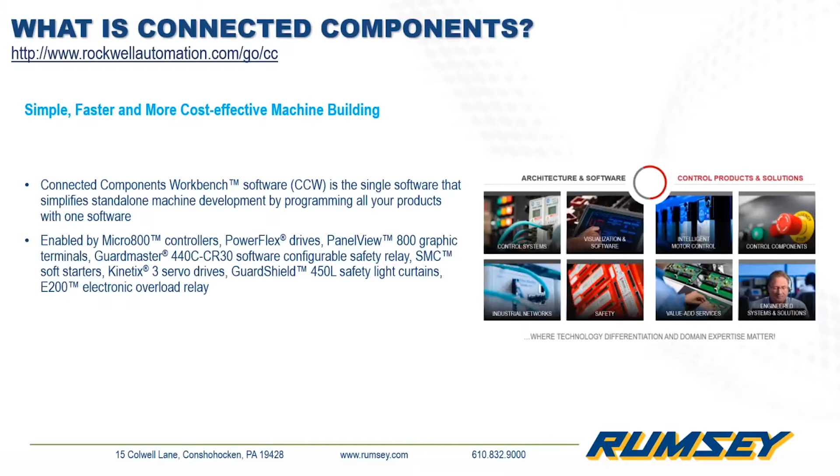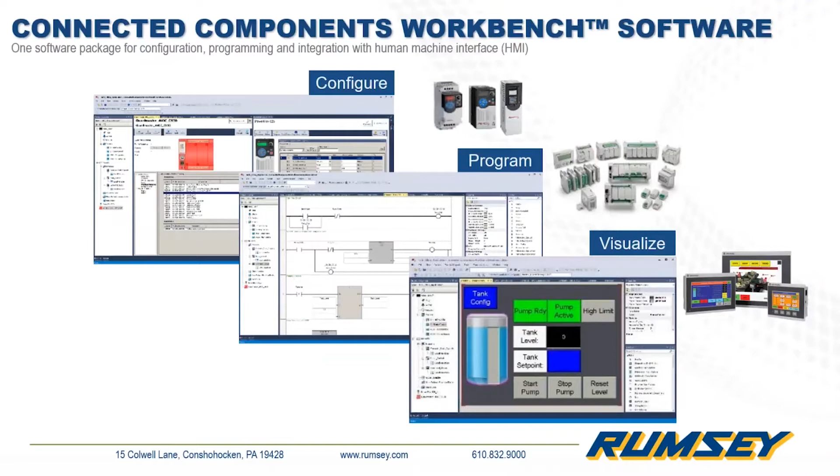So Connected Components Workbench software is a single software that supports configuration of devices such as the PowerFlex drives, and programming. So we have a program editor in here for the Micro800 and even DeviceLogix, which we're going to get into later today, and a visualization editor, which allows us to develop screens for the PanelViews.

So moving on to using Connected Components Workbench software with PowerFlex drives. There are multiple options for programming and interfacing with PowerFlex drives. I think most are familiar with the traditional way of programming a drive via the keypad or the drive HIM. So basically, you'd be standing in front of the drive, viewing and editing a single parameter at a time.

Connected Components Workbench software helps us to basically get the drives up and running using an intuitive interface and configuration wizards. So we can configure, program, monitor, and control from our computer. We have access to application and trending wizards. You can save or back up configuration files to your computer. And it's designed to be used for standalone machines.

Lastly, Studio 5000 can be used for programming drives as well, drives that are integrated and being used along with a Logix 5000 controller. And this gives us additional features, which would be Premier integration using add-on profiles to configure the drive, and also automatic device configuration.

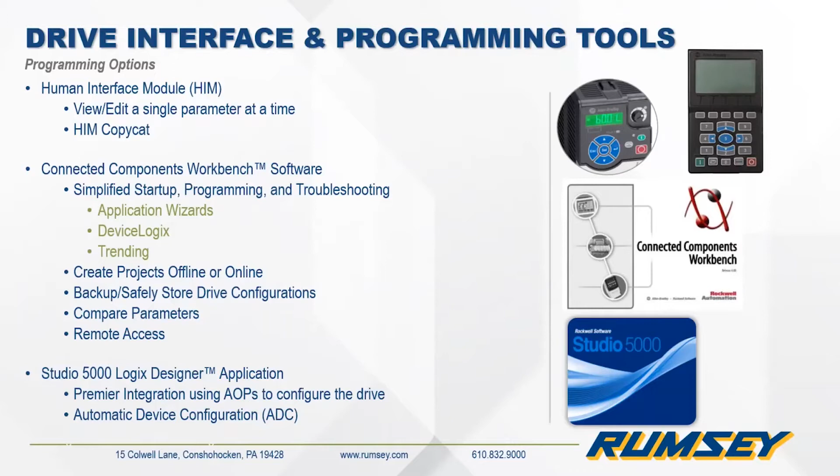So if someone is familiar with using Studio, for instance, and they needed to do an application with a standalone drive, it might not be with the Logix controller, they should be comfortable configuring a drive in there. And the same goes if you were already programming or configuring drives in CCW and needed to do something in Studio, you'd look and have familiarity there.

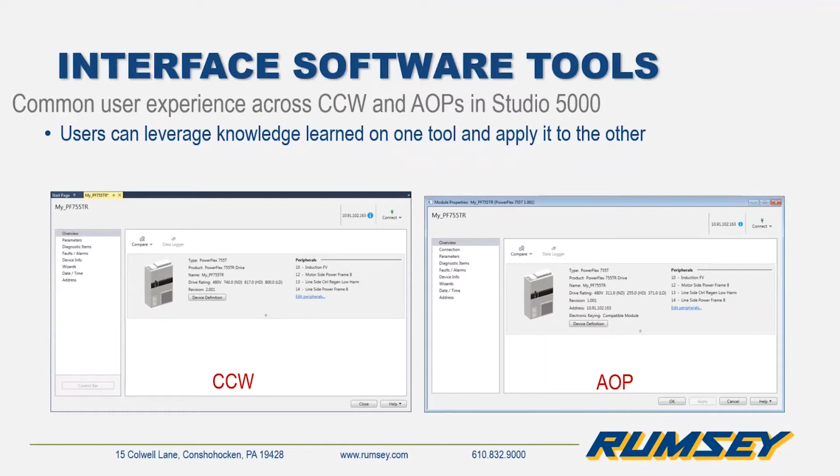So Connected Components Workbench software supports configuration for all current active PowerFlex drives, including the new PowerFlex 755T and medium voltage drives. So in the next few slides, we're going to cover some of the features and navigation of the software.

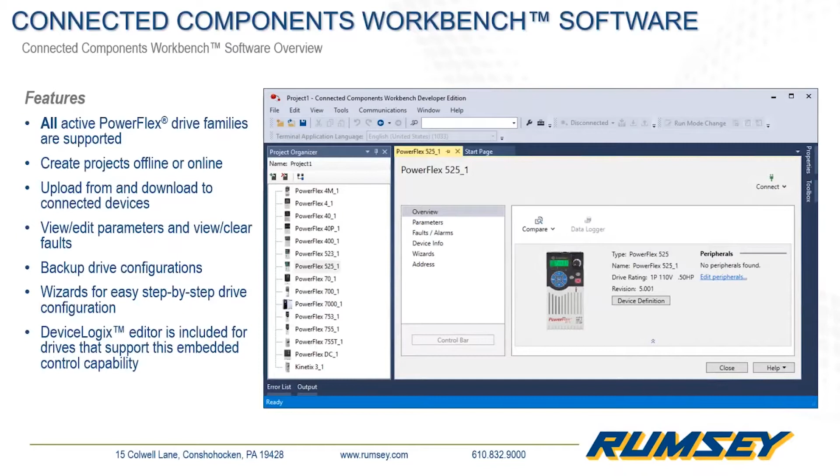So the start page is your launching point for starting a new project, opening existing projects from file, and also browsing or looking for available devices that we can connect with and go online. When we first open up the software, you're going to see basically a start page. On the right-hand side, there is a device toolbox.

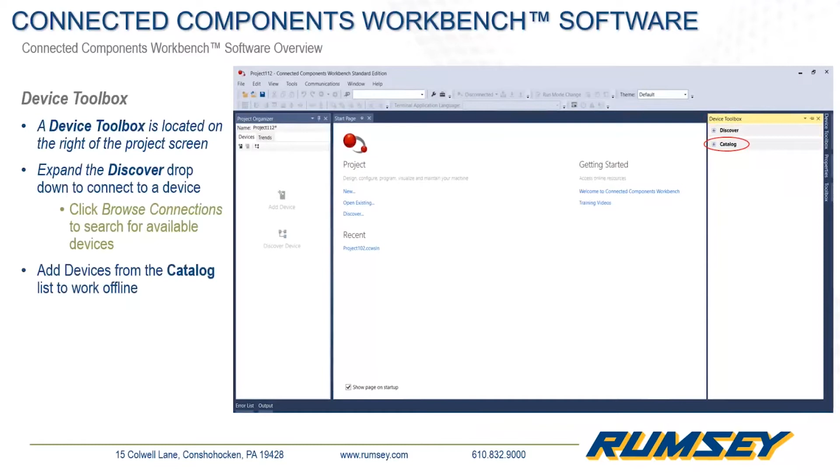There we can actually look for or discover devices that are available to connect by expanding the Discover drop down and look for connection browser or look for available devices that way. And also below that, there is a catalog, which if we expand gives us a list of available devices that we can bring into our project to work offline. If we select a device, it'll be brought over into the project organizer, and we can start working on our project.

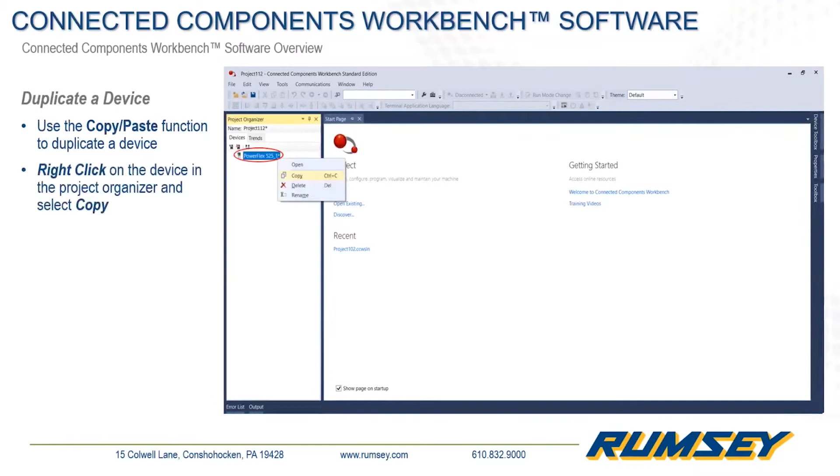We also have the ability to copy and paste devices into the project. This can save us time if we have multiples of the same drive or they have a similar control. We can right-click on the device in the project organizer, select copy, and then paste as many instances as we need into the project. And we can see here, if we highlight or select a device in the project organizer, information is displayed over to the right of it in the main work area.

So this slide just gives a little detail here regarding the device window. At the top of the page, it actually displays the name of the device that we have selected here in the project organizer, so what actual device is being looked at here. Below that, we have information concerning the device itself in the main device page. And on the left, we have the navigation tree, which displays available functions for the device here.

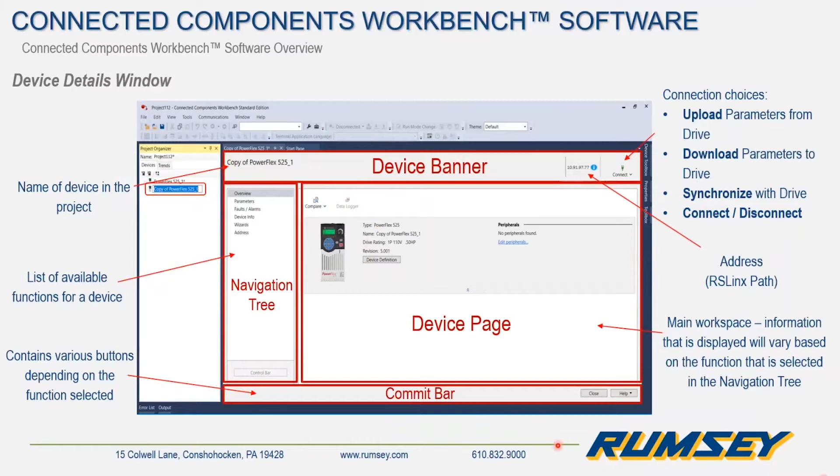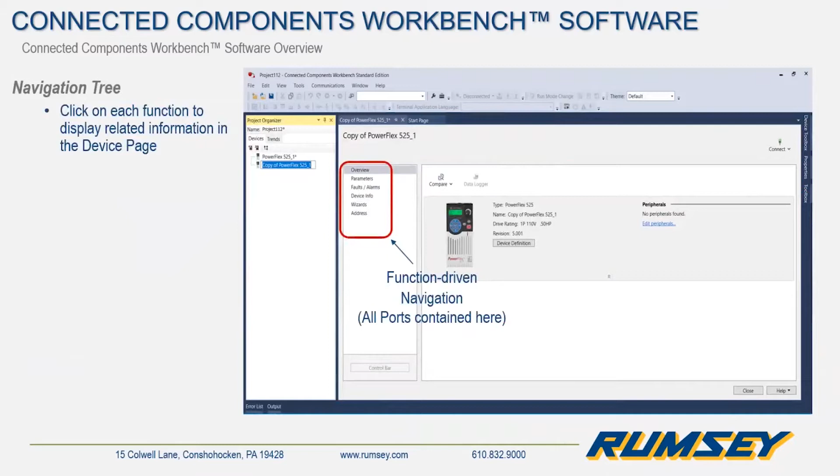Okay, so the navigation tree, like I mentioned, we have a bunch of different functions we can select. If we were to click on parameters, basically all of the parameters for the entire drive are shown here in numerical order. There's quite a few parameters available, so we also have the ability to actually filter down and refine that by searching here. So we can filter by port as shown. We can also, with certain devices, filter by group or parameter group.

And we can also actually select and show non-defaults. So this is a nice feature if we want to quickly look at any parameters that were changed in the drive. To the right of that, we have the ability to actually filter a value by putting in a keyword or a parameter name to narrow down the parameter instead of hunting through the list.

And just to the right, we have the ability to reset the parameters to default. For whatever reason, we determine we want to start from a clean slate, we can reset defaults. And we also have the ability to select which specific port we want to reset as well.

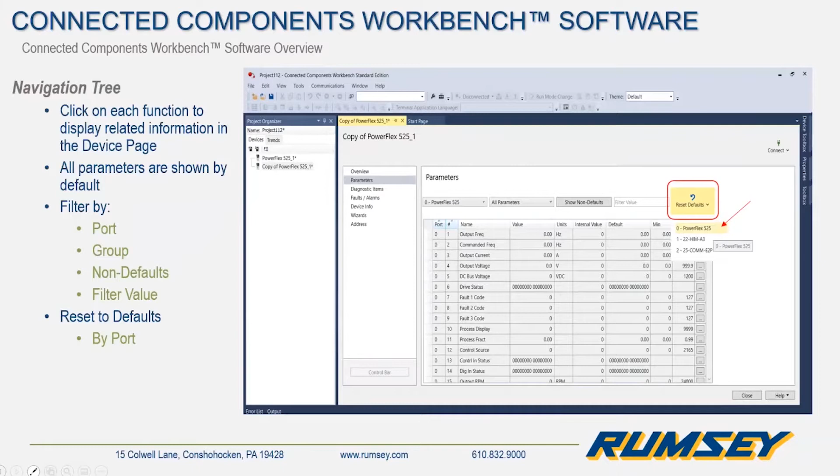Jared, I just want to make sure to point out to everybody, you had mentioned it with the non-defaults, but there was a time way back with drives when you didn't know necessarily what somebody went in and changed and you were having some issues. You would basically reset a drive to defaults and kind of start over just because it was so hard to find them. So from a pure troubleshooting standpoint, the ability to go into any of the PowerFlex series and see what has been set versus the default value is extremely valuable.

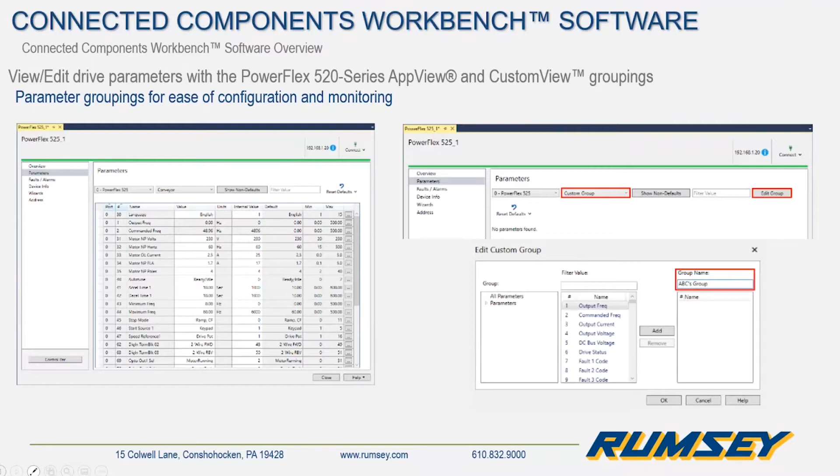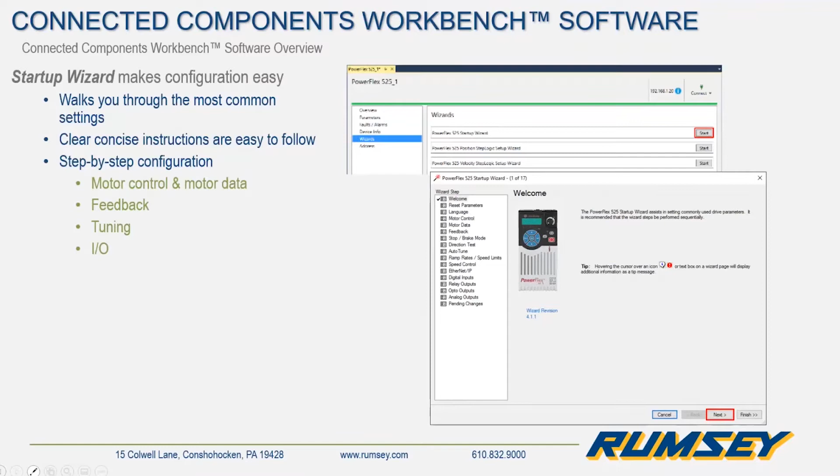The wizards are available for each drive, and depending on the device, as you can see here, when we select wizards in the actual navigation tree, there are different wizards available for each drive type. So the 520 series does have different available startup wizard and wizard options from, say, a PowerFlex 750 series.

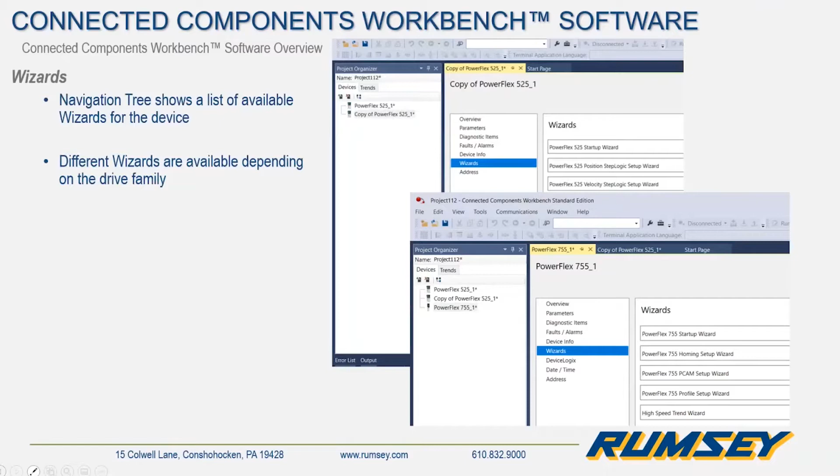The PowerFlex 750 series has embedded DeviceLogix capability. This provides the ability to function as a standalone system or operate together with a controller. The DeviceLogix can be configured using the logic editor in CCW or Studio 5000, and it's programmed using function block or ladder logic programming.

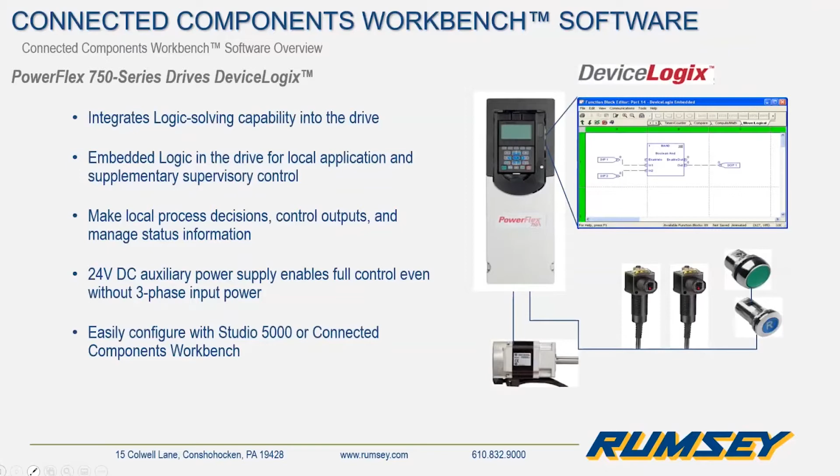Some examples of DeviceLogix functionality would be controlling logic command bits, or controlling a speed reference, monitoring logic status or speed feedback, and reading and writing different parameters.

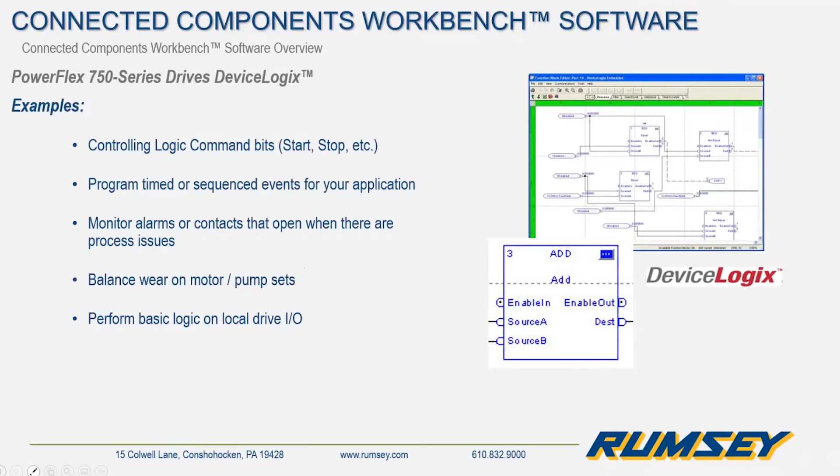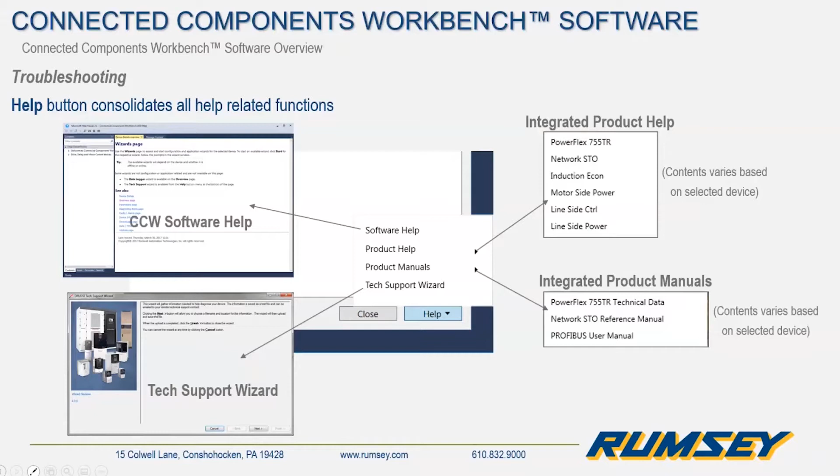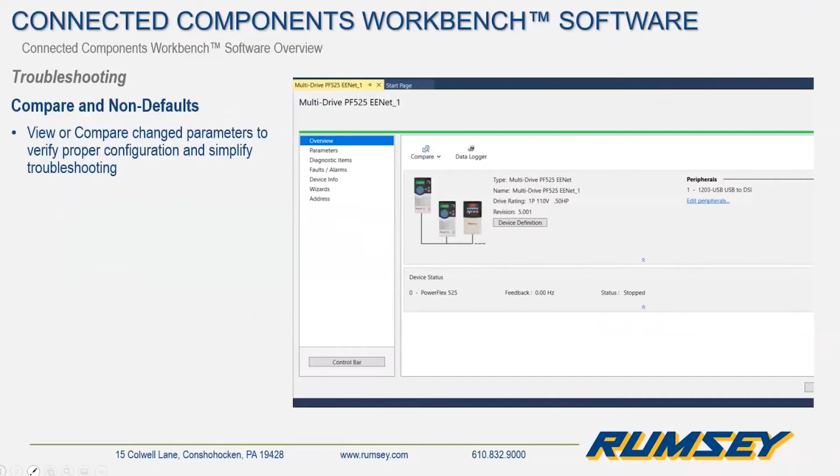We also have the compare function, so we can look for differences between programs or devices. We can compare the drive to the defaults, what we have on file, or another device. And you can see here in the overview function, at the top left, there's the compare button, and we can select how we would like to use the function.

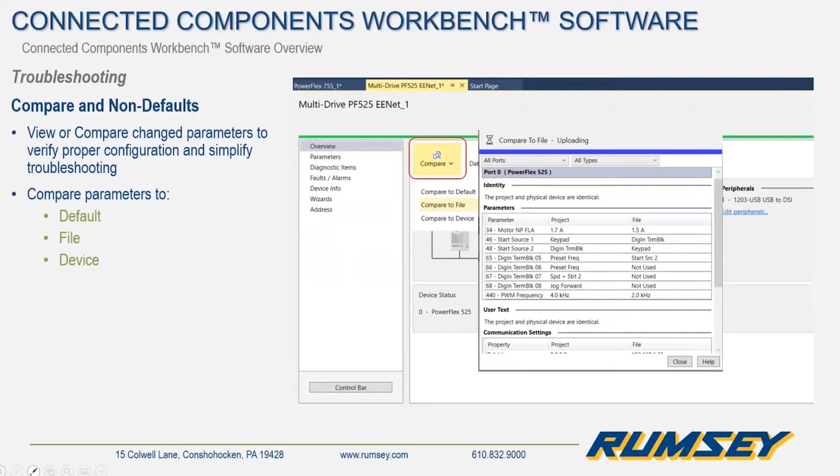As Sean mentioned earlier, and we touched on briefly, in the parameters we have the ability to show non-defaults, and it could be really useful as a troubleshooting tool. Simply by going into the parameters, either in all ports or in a specific port or group, we can show all the changed parameters for that.

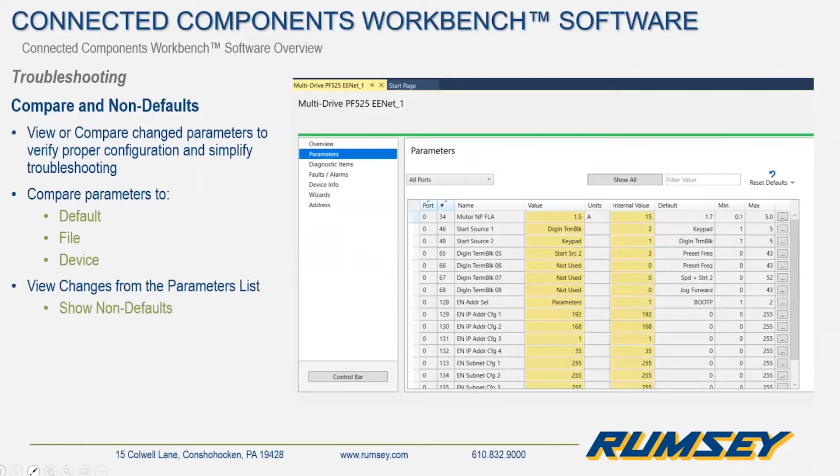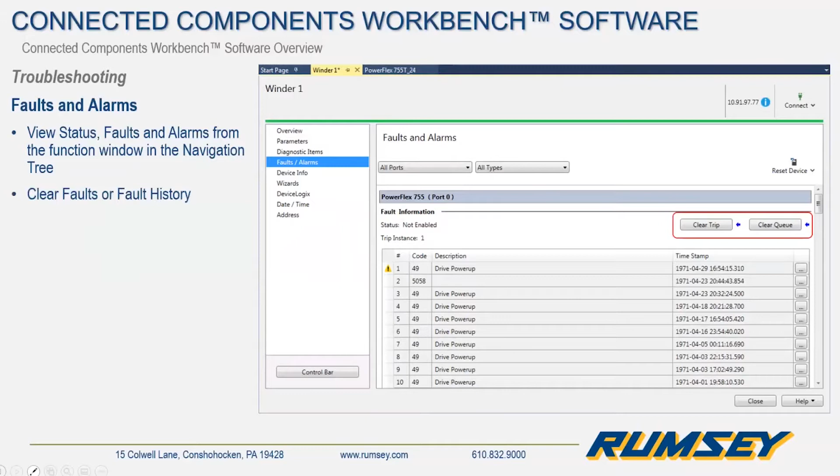Moving on, there is a function for faults and alarms, which will show the current status of the drive and also display the history of any faults or alarms that occurred. We also have the ability to clear faults or the actual fault history in the faults and alarms.

Next is the diagnostic items, which displays a bunch of parameters that are related to the status and really give you an idea of what's going on with the drive. They're all grouped together in what we call here the diagnostic items. So useful for really determining the current status and seeing what's going on with your drive.

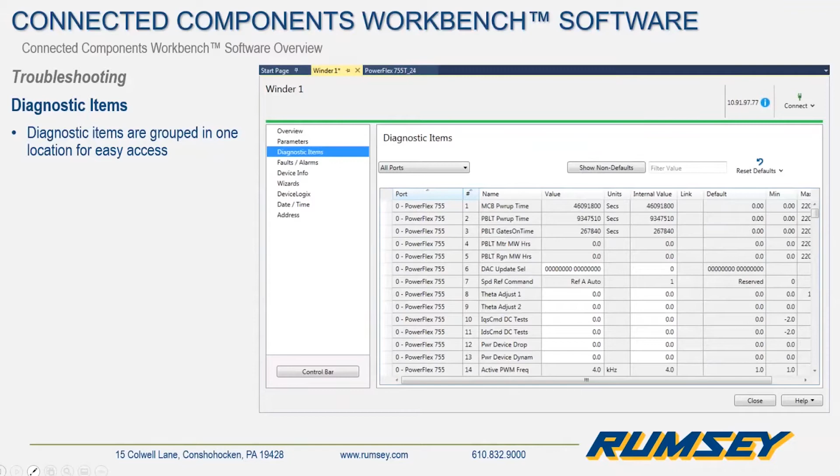It allows us to access multiple parameters at one time. As you can see here, we're looking at our reference and also our logic status. And we'll confirm the proper operation, that our drive is configured and functioning properly.

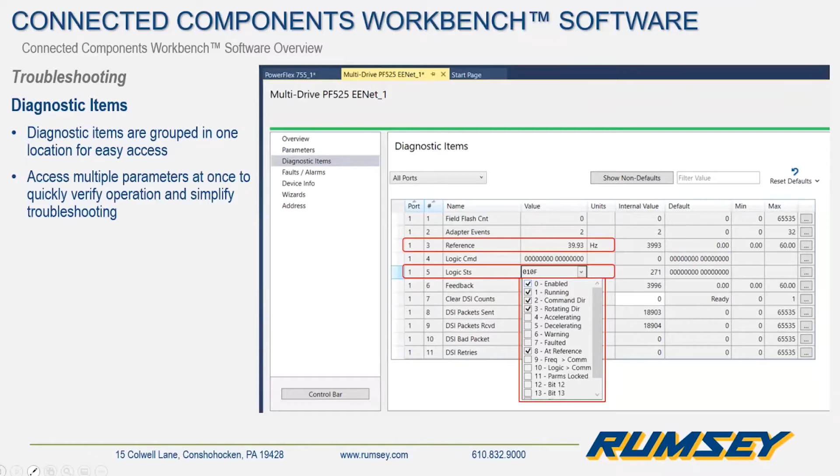There are several predictive maintenance parameters available in the PowerFlex 750 series drives. These parameters can track runtime or cycles for internal components on the drive. They also have the ability to track the runtime of your motor or machine, so we can get notifications if we require some type of maintenance, for bearing and lubrication, for instance.

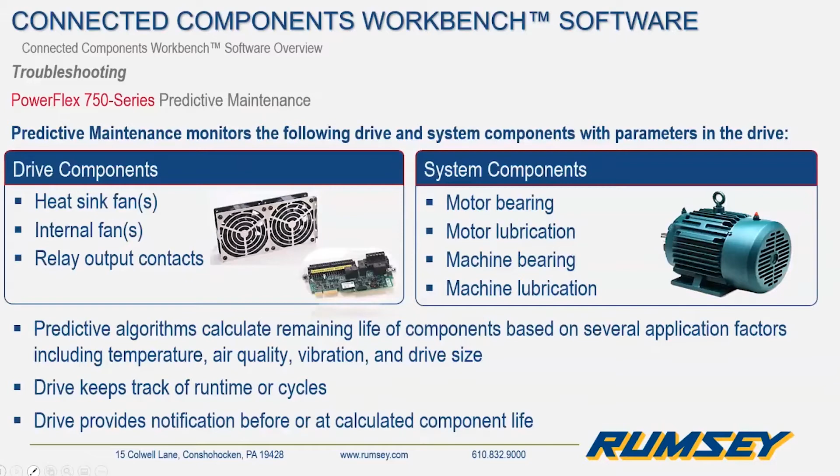All of the available parameters are displayed there right in front of you. You can easily see all your options and what to configure at one time. It probably lends itself a little bit better than hunting through the keypad, in my experience at least.

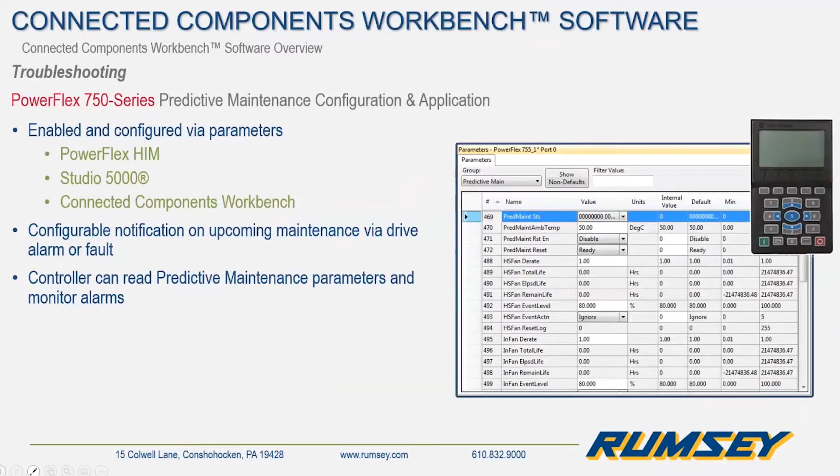There's also a trending capability in Connected Components. So if we need to actually capture or analyze data based on how the drive is operating, we can start a trend and hopefully be able to gain a better insight into what is actually going on with our process.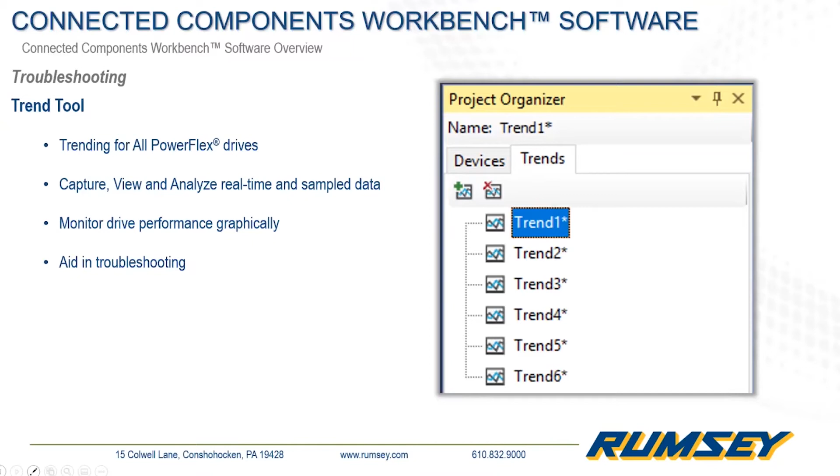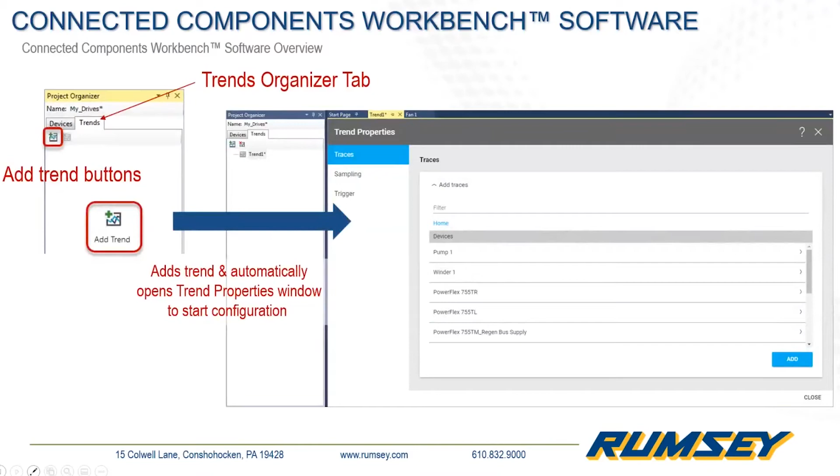So over in the project organizer, next to the devices tab, we have a trends tab. If we select that, we can click the add trend icon, and a trend properties window will populate in the main project area. It'll give us basically settings that we can set for our application to create the trend.

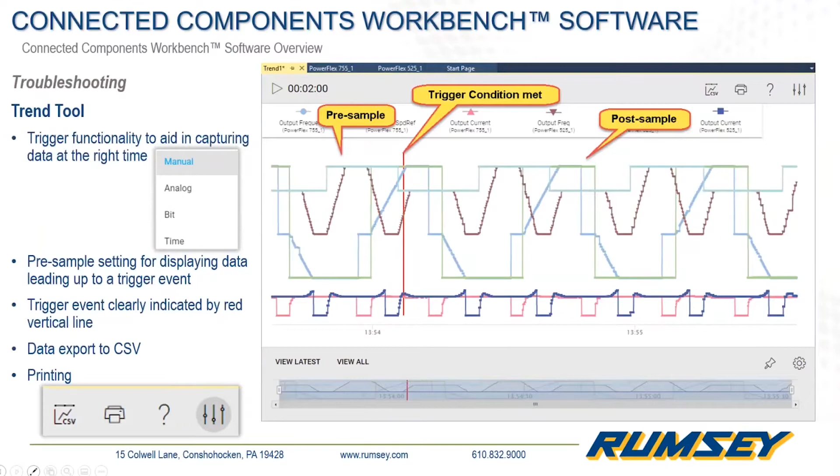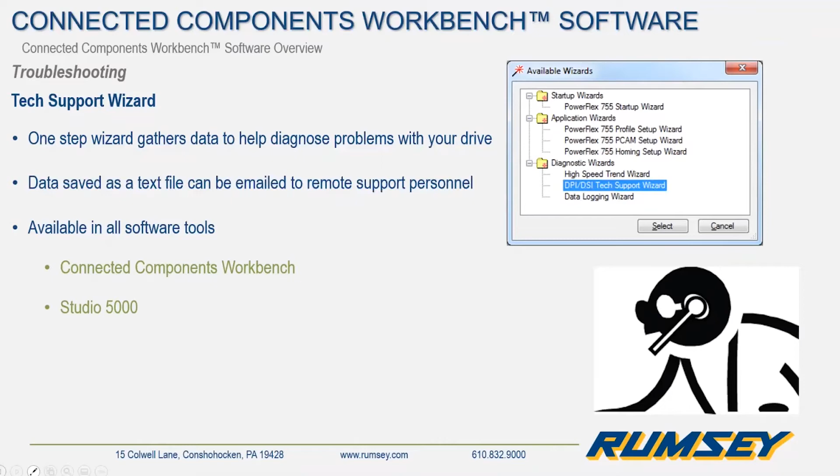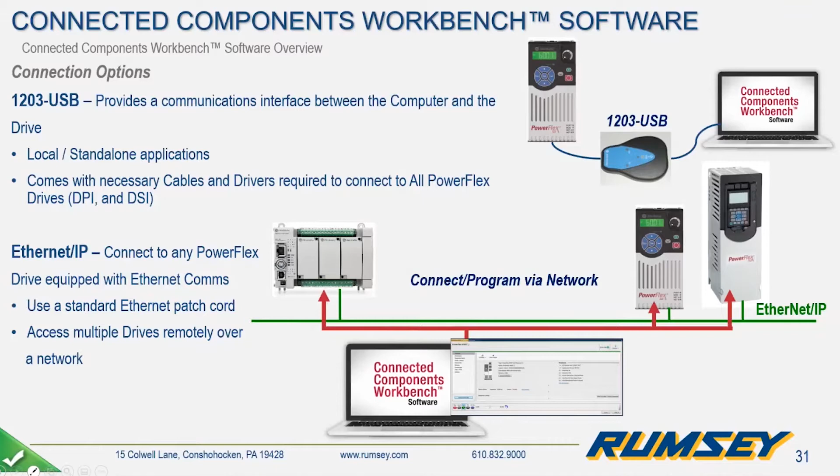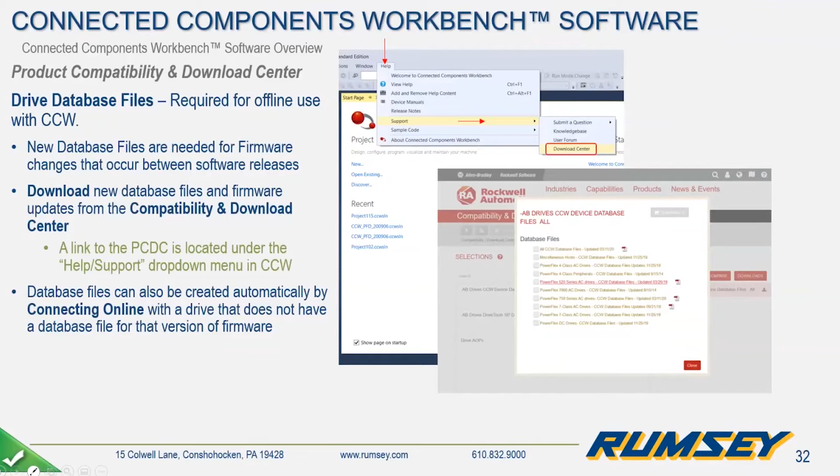Okay, so at this point, I'd like to launch the Connected Components Workbench software, and we'll go through using the 520 series startup wizard. As mentioned earlier, we have the start page upon opening CCW, and we have different options. If we want to connect to a drive, we can use the Discover button, or we can expand on the right-hand side and use Browse Connections under the Discover tab in the toolbox.

We click Browse Connections. Today we're going to be using the 1203 USB serial connection. I've connected to the drive locally. So I'm going to expand the Data Highway Plus and look for a DSI connection since it's a component class drive. Click on OK, and we can see we're connecting to a device.

Once we've established connection, we can see the overview function tab of the navigation tree is highlighted, and we have a PowerFlex 525. It shows the actual rating and revision number. We can select and add it to a project, and we will begin uploading the information from the drive.

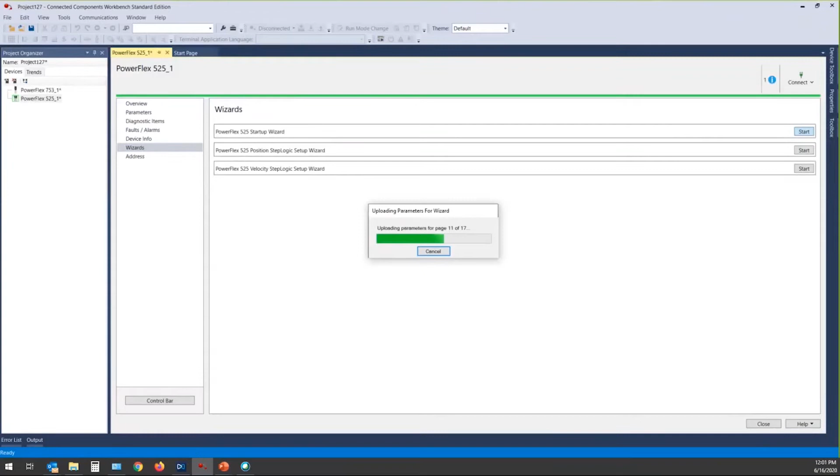Wait for that to upload. I'm just going to drag this over so everybody can see it. What we have now is the PowerFlex Startup Wizard, and the first thing that comes up is a welcome screen. It explains that if we hover our cursor over a parameter or option, it gives us additional information. Once we finish entering the required information on each page, we hit Next, and it takes us to the next required step. It leads us through most things we need to configure on a typical startup.

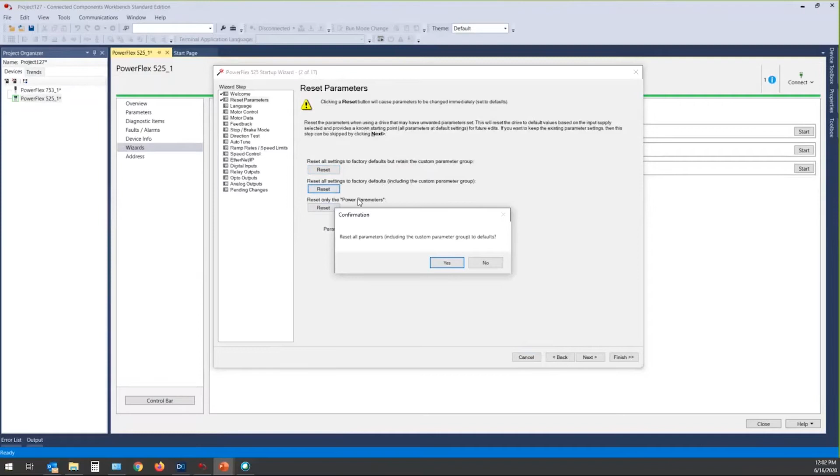At the very start, it gives us the option to reset the parameters on the drive. Here we have a couple of different options. We can retain custom group parameters if we had them already made. We can reset everything, including the custom parameters, and we can do just power parameters. Today we're going to select reset all to factory defaults, and then say yes.

The reset occurred almost instantly, as my drive indicated locally. But shortly, we should get verification on the screen as well that parameters were reset. Once that is finished, we can select the next step. In our case today, I'm going to stick with English.

Moving on, it prompts us to select our desired method for motor control. Depending on the drop-down selection, different options become available, so we can input different information depending on what we select. We're going to stick with sensorless vector control, and then move on.

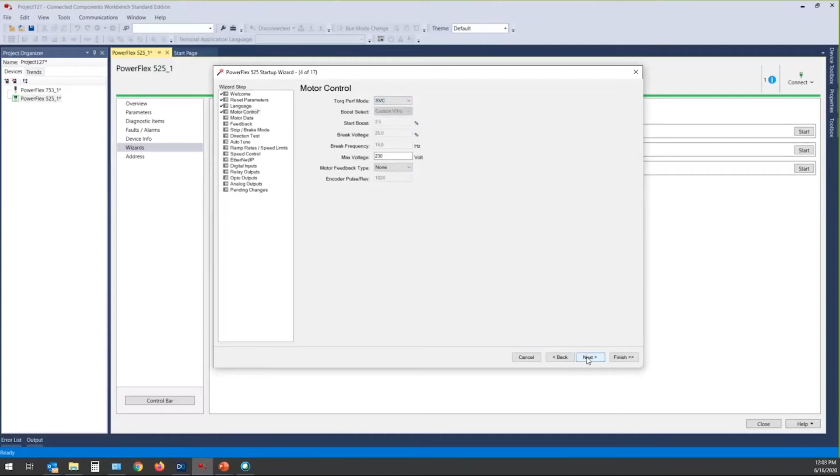In this screen, we would enter the motor nameplate data, which is critical for any application. I'm going to set up the information for my specific motor on my demo. I'm going to enter my overload current and my full load amps, and then change my RPM and my motor rated power. Once we've entered that information, we can move on to the next step. If we were going to be using any type of feedback, like an encoder, we could enter that here.

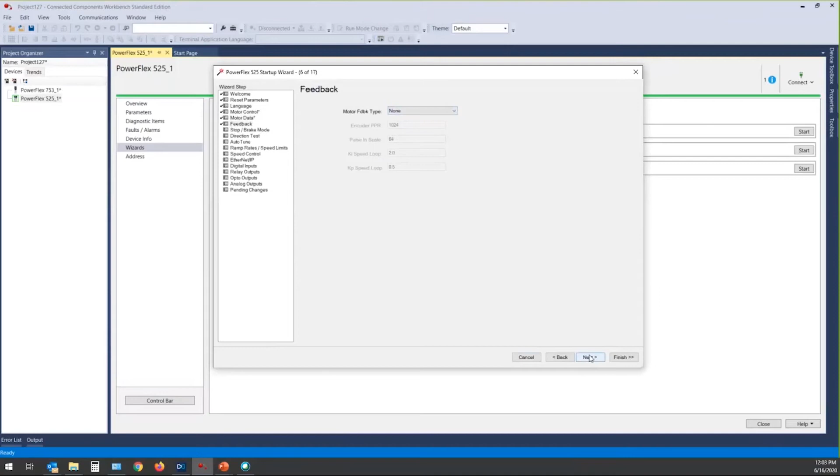And then it carries us to the stop and brake type configuration. So if we were going to be using a dynamic braking resistor, we could enter that. And below that, we have the option to select the actual stop mode for the drive. So you can see here, there's different stop functions, and there's also a CF behind some of these options.

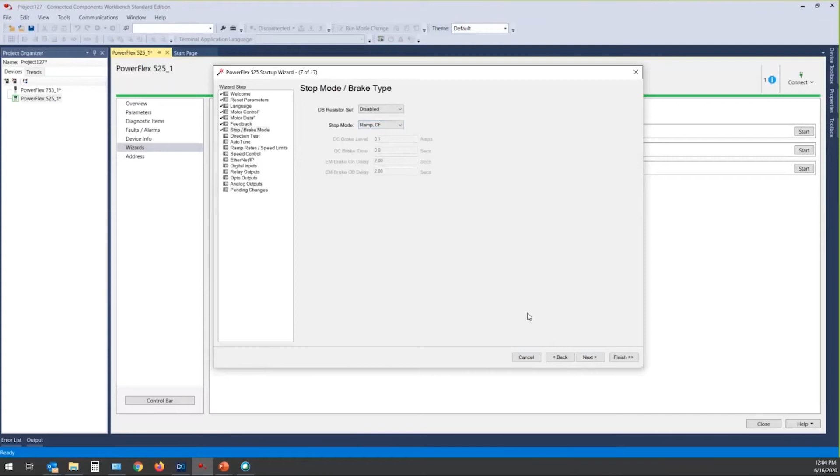So the CF actually stands for clear fault. We weren't aware of that. I'm going to stick with ramp and clear faults as a stop function here, and go to the next step.

Okay, this portion of the startup wizard actually does a direction test for us. And if you recall earlier, we did a reset of parameters. Once we perform that function, the drive actually faults at an F48, letting us know the parameters were reset. So we're currently in the faulted status. And if you remember, a step earlier we had selected the stop as a clear fault. So we should be able to reset the fault here right from the stop button, which we were able to do.

In this case now, we can actually, if it was safe to do so in the field, bump the motor and verify direction if we wanted. So here I could set a jog speed and use the jog function by just holding it down, and momentarily we can see on the display on the right that we're actually running the drive at the desired frequency in the jog function. And I'm not sure if you can hear in the background my drive fan, the heatsink fan is actually turned on because we were in fact running the drive.

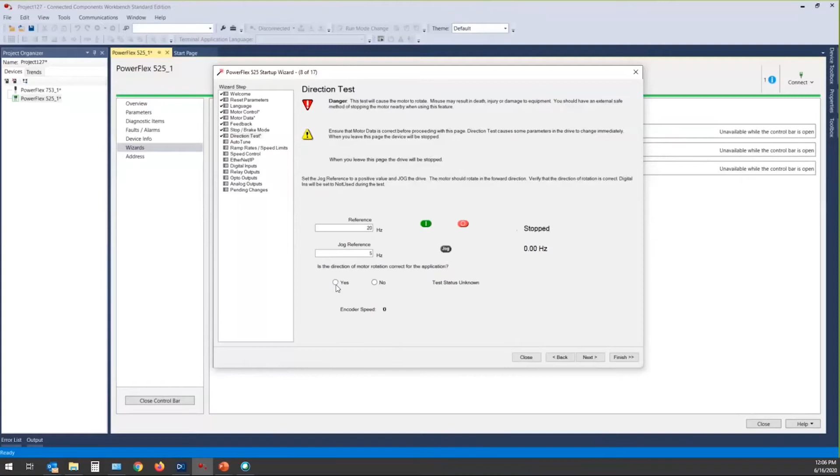We can also use the run function if that was required, or that was your preference. You can actually run the motor in a direction and verify rotation up here. And again, if we hit the start button, it says that our speed reference is not currently set for the COM port. So it would do that for us if we would like. So we're going to say yes. And here now we can see the drive is accelerating to the reference I specified. And we can stop the drive. If we verified that rotation was okay and we're all right with that, we can select yes and proceed to the next step.

So this step in the wizard allows us to perform an autotune feature. We have two choices here for the 520 series. We have a static or rotate tune. The static tune would be for any instance where we could not uncouple the actual motor from the load. If we were uncoupled, then it would be okay to do a rotate tune if it's all right for your application. Either way, we'd only really need to do one tune. If we do the rotate tune, it actually performs the static first and then the rotate.

In this case, I'm going to select rotate tune, and the drive is going to start the tuning process. So within a few moments, you might be able to hear that the drive is actually running the tune here in the background. Now we're into the rotate tune portion of the test. We can actually see the drive is ramping up through different speed ranges. Okay, so now that the test is completed, we can proceed.

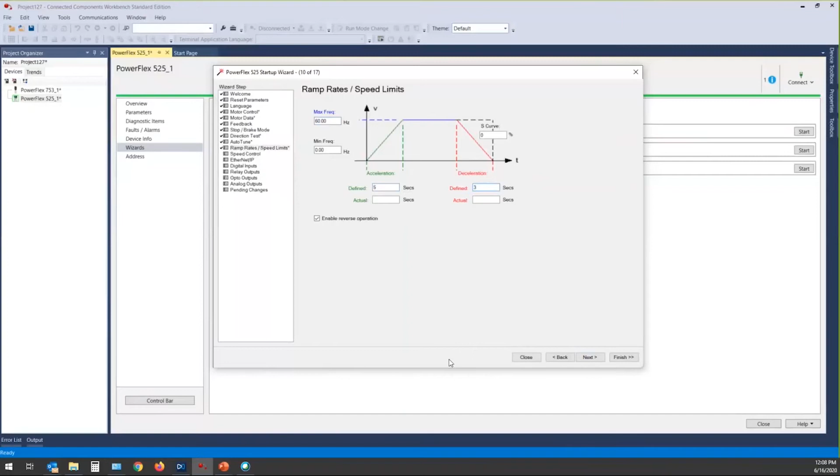So in the ramp rates and speed limits section, we have the ability to change our maximum and minimum frequency. And we can also set our accel and decel time. So here, if we wanted to, we can change these rates to the desired value and move on if you're satisfied.

In this tab, we set up the speed reference. The speed reference is required to tell the drive what source to follow as far as a speed command goes. So remember back in our direction test, the software helped us to change it to the serial connection so we could make an adjustment there over to software. We're going to change that now to the drive potentiometer, or the pot that's on the face or the keypad of the 520 series drive for local control here.

And as you can see listed at the top, there are different options, so we can have multiple speed references depending on the application requirements. Today, we're just going to focus on the drive pot.

The 520 series has an embedded Ethernet port. If we wanted to set an IP address for the drive, we can enable parameters, and then it would give us the option to actually set the IP address, subnet mask, or gateway accordingly for your application.

Moving on to the digital inputs, you can see here we have another opportunity to change or set our stop mode. At the very top, we want to set our start source. This is going to tell us exactly what we're going to use to command the drive for start, stop, direction, for instance. So right now, the main start source is configured for the serial DSI connection. We're going to change that to the digital terminal blocks, or the terminals on the drive.

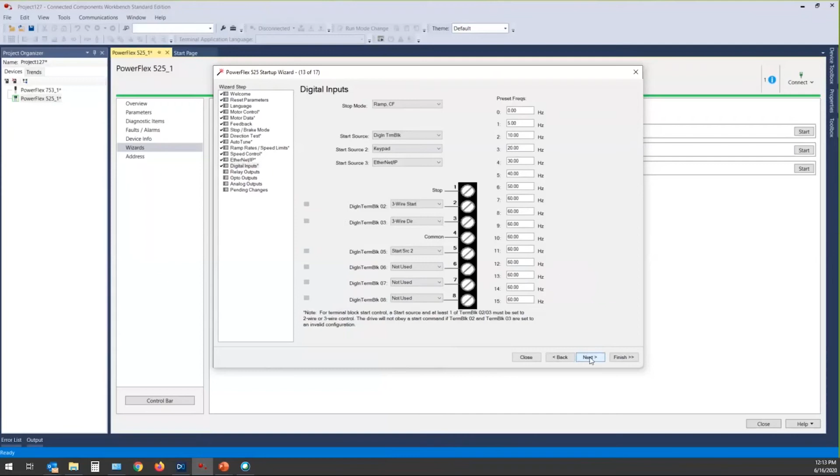And here it gives us the ability to program the relay outputs that are on the drive. So you could choose your functions here, or what you would like to use the relay for. The same goes for the opto outs that are on the drive as well. And then if we needed to use an analog output to provide any type of feedback, we can select that here as necessary.

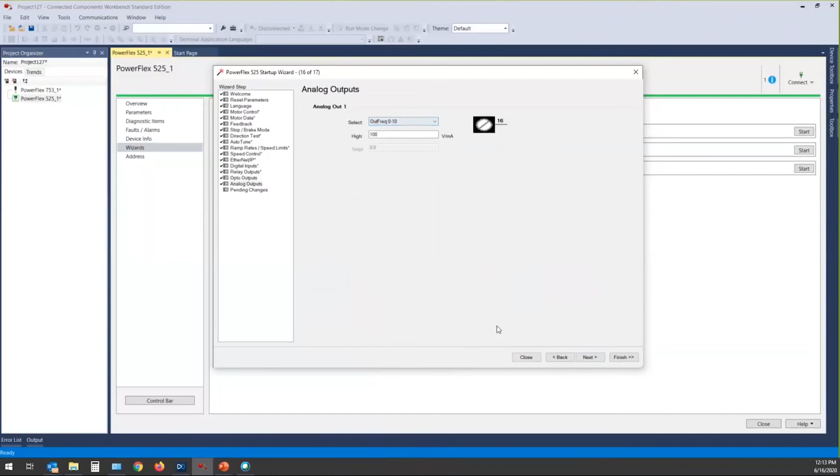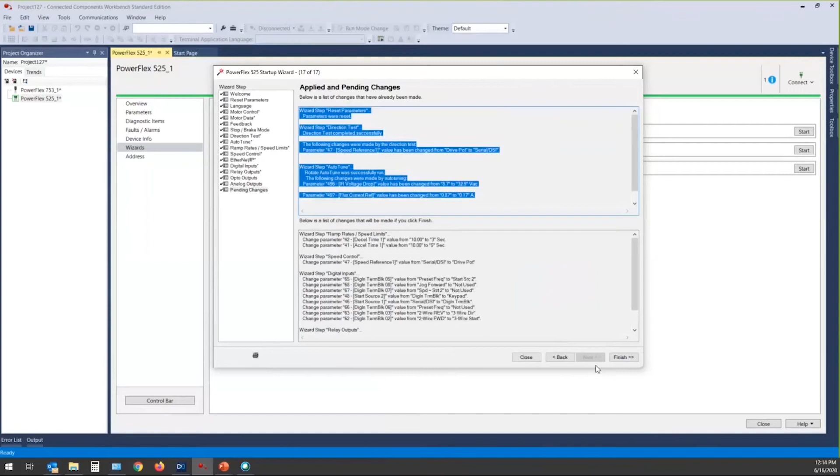Now that we've gone through all of the steps of the wizard, it prompts us with applied changes. So basically at the top here, it gives us a list of changes that were already made throughout the startup wizard. And then below that, it's basically saying, here's a list of the parameters that we changed in the wizard, and if we click finish, they're going to be made. So we're going to go ahead and say yes, we're going to make these changes. Once we select finish,

I'm going to go up to my diagnostic items and display the diagnostics area of the drive. We can see right here we have the current speed reference on the drive. We also have the logic status, and we can see the current state. The drive is enabled, and it's not currently running. So if I hit the start switch, we should see the drive goes into running and accelerates, and once it's accelerated up to reference, we even get the at reference indication. We can see if I change the speed reference, the drive responds accordingly.

Here, if I select direction, we can see the drive decelerates and begins accelerating in the opposite direction. And once again, once it gets to reference, I hit the stop button, and you can see that the drive is actually stopped. And if I was to change the actual reference, I can operate it from the keypad as well. So I'm doing that.

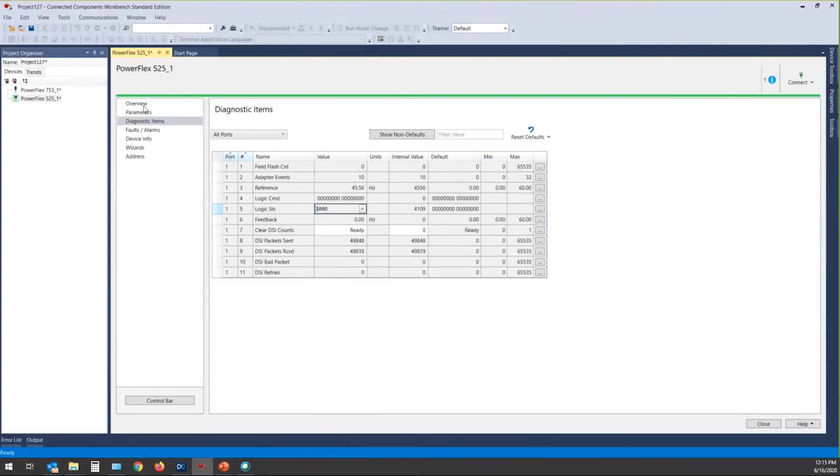So, pretty straightforward operation. And again, the startup wizard took us through all the steps necessary to get our drive up and running here today. So once we are happy with our configuration, we also have the ability to save it, right?

If I select the drive over in the project organizer, I can actually name the specific device. So in this case, I'm just going to call it conveyor 1. And if I want, I can actually save the project. We can call this whatever we like, and save the project for later reference. Okay. That's really all there is to it using the startup wizard.

I'd like to go over a couple other things in here. We talked about navigating through parameters and such, and the 520 series doesn't have nearly as many as, for instance, a PowerFlex 755 or 750 series would have, with the multiple ports and the flexibility with the rack style architecture that we can add and subtract the option modules as desired.

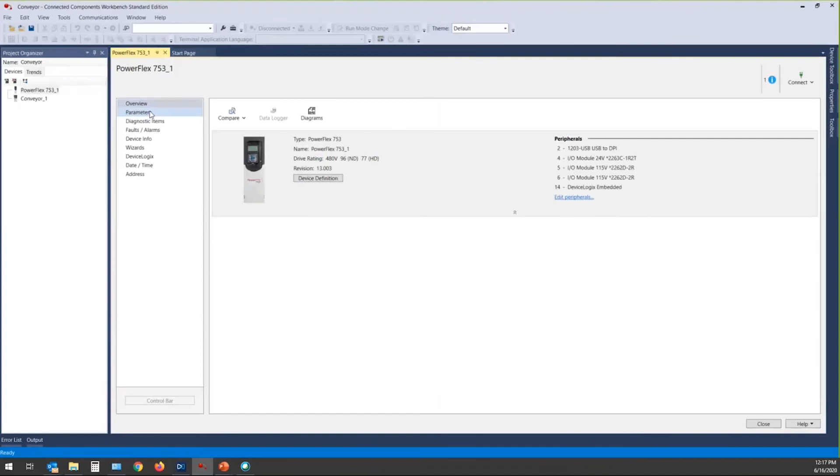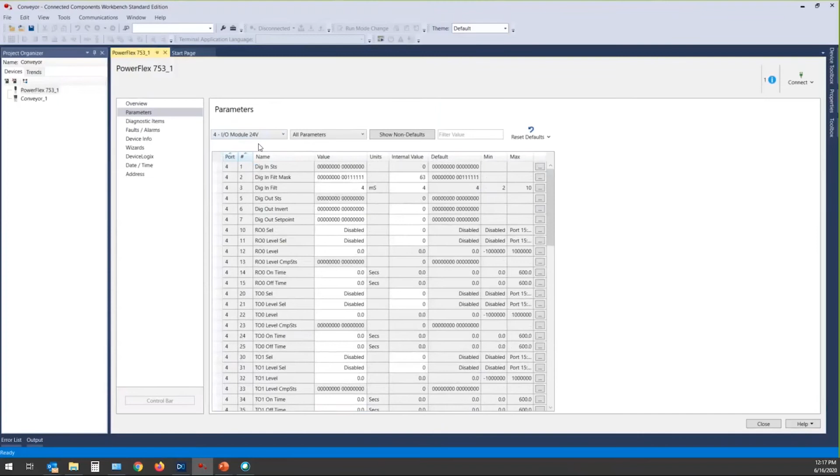So if I go into the parameter selection on this 750 series drive, I can see all my port options that I have the ability to narrow down and select the parameters specific to the port. Okay, so again, I just selected a 24 volt I/O module, and here we can go into and set the relays or whatever necessary parameters for that, or look specifically at the drive parameters itself.

Also wanted to note that here we're looking at a drive that has 24 volt and 115 volt I/O modules installed. So we can mix and match the control voltage if necessary. And we also have the ability to add COM modules or any other type of option module in there as well.

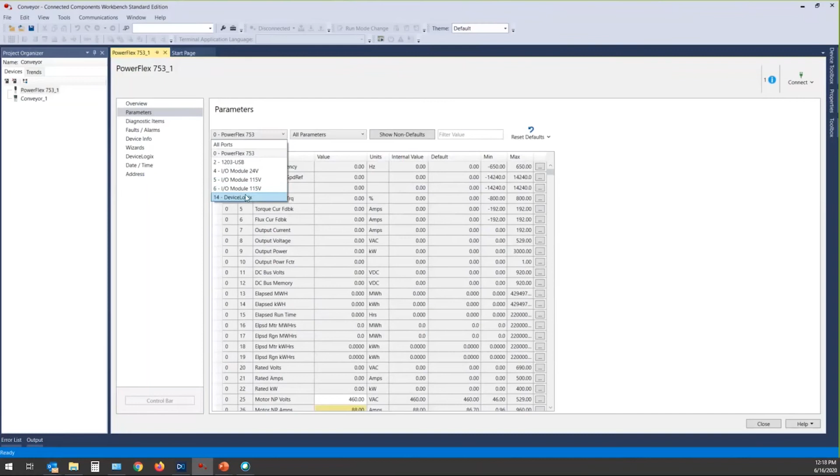All right. And we touched on DeviceLogix during the presentation. So here you can also navigate to our DeviceLogix parameters if you were using that functionality. In the navigation tree, there is a DeviceLogix function in which we can launch the editor, just to give you an idea what some DeviceLogix would look like if we were using that functionality in the drive. Here is the DeviceLogix editor showing some function blocks.

And if you're familiar with any other type of program editing tool, this is what you would be used to seeing. Then if we select any variables, we can go ahead and see them in the drop down here, available selections. So just to give you an idea, the DeviceLogix editor.

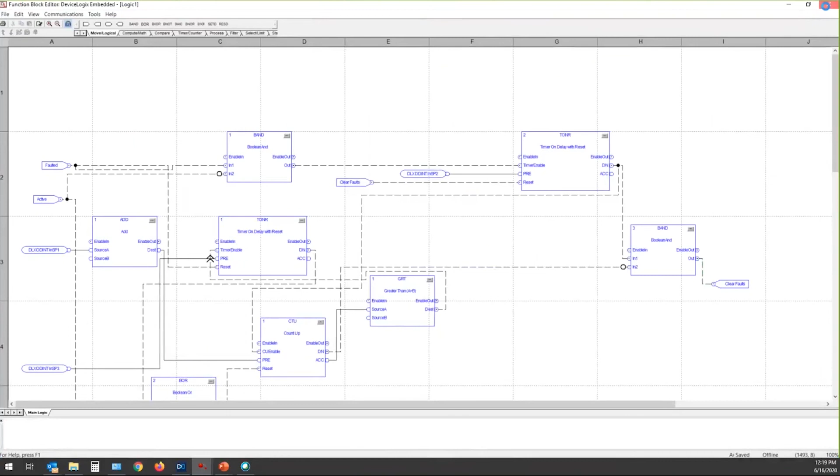Okay. For those of you, and we might be able to get some questions on this later, that are familiar with or have any files saved for older configurations using Drive Executive software, so if we have any drive configurations or backed up files with Drive Executive, we can also bring those older files into Connected Components Workbench, right? So we can actually go in and import a device file, and it could be, like I mentioned, an old Drive Executive file.

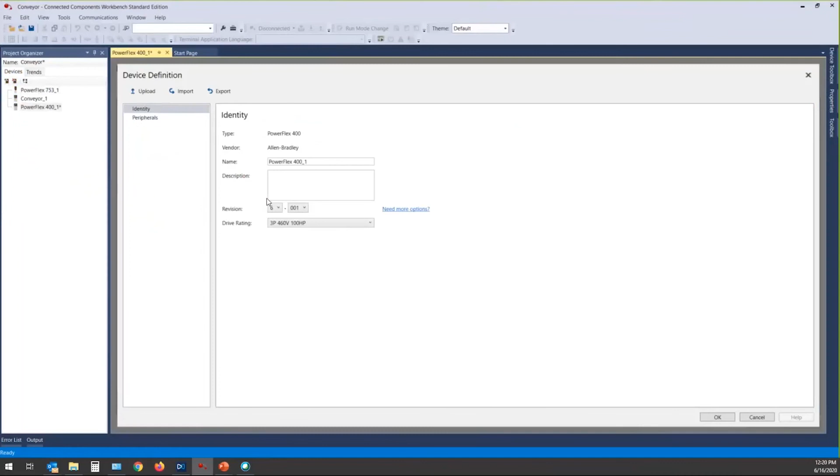So if we look here, this is actually an old DNO file from Drive Executive. So again, if we just select it and say open, it brings it right into the project for us here. And just like the other CCW, we have access to all the parameters and information for that drive. So that's really all I wanted to cover for the software.